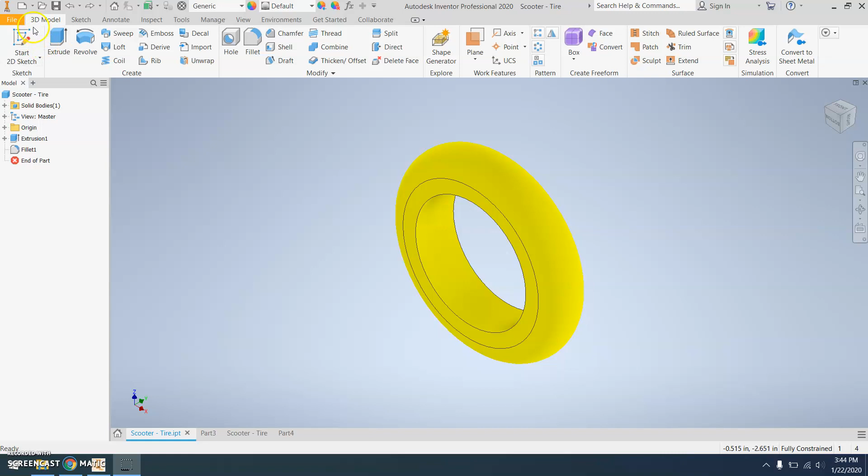Like always, you're going to go File, New, Part. You're then going to start a 2D sketch. Choose the XZ plane. Must choose this if the rest of this video is going to make sense, so you got to choose that one. Otherwise, when you go to revolve, it won't work.

Now we need to change the units. On this project, we are using millimeters.

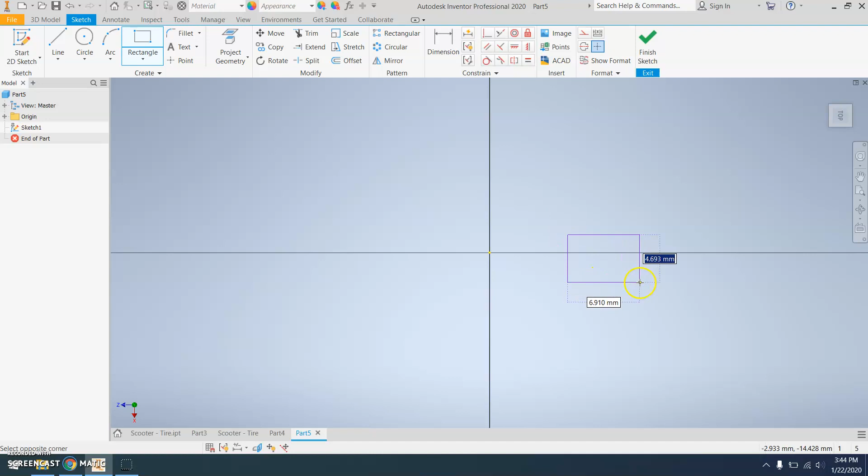All right, so now go back to your sketch tab. You're going to make a generic rectangle out to the side of the origin. You're then going to dimension from the origin to this inner edge, 35. Hit enter. You're then going to go from the origin to the outer edge, dimension that 55.

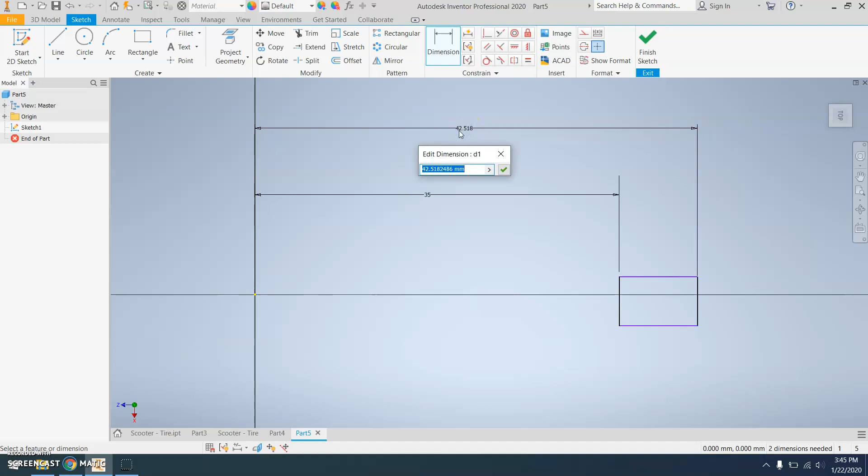And then lastly, the height of this is going to be 24 millimeters. Finish your sketch.

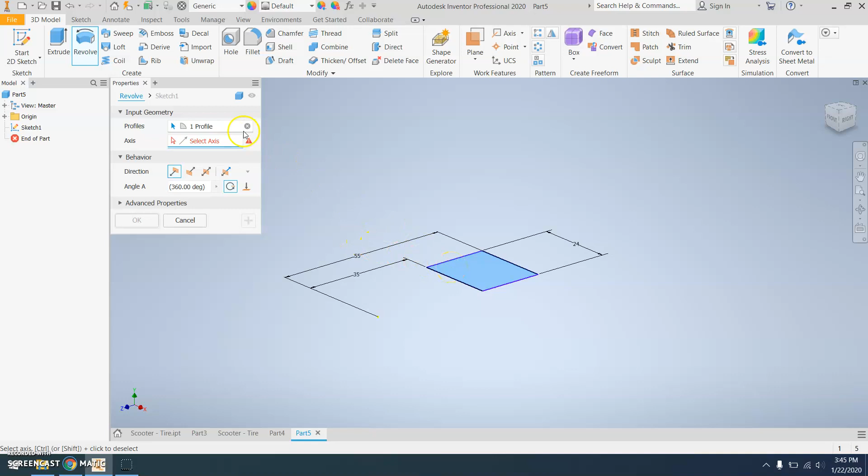You're then going to use the revolve tool to make this. Choose revolve, it already chose the profile for you. Axis, though, it doesn't know what you want to use, so you'll have to do a drop down here under this origin and choose X-axis, and then hit OK. Notice you can change the angle here if you want to do a partial revolve.

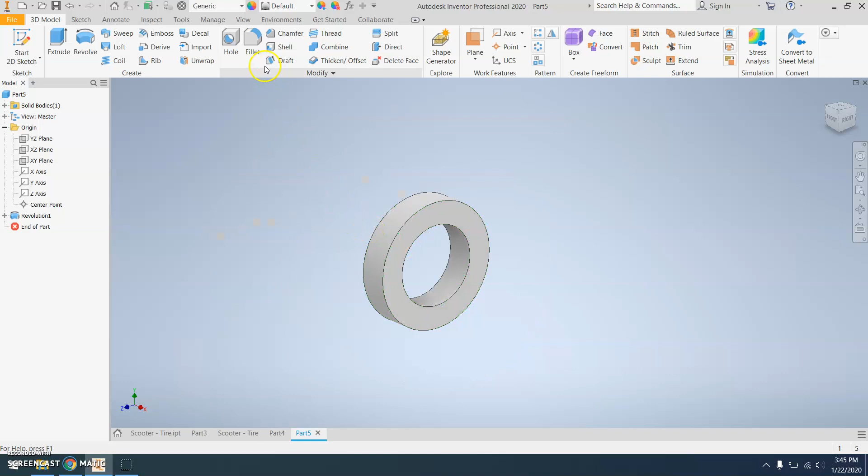And then lastly, we're going to do that fillet. The fillet is 12 millimeters. Hit OK. And then color it in.